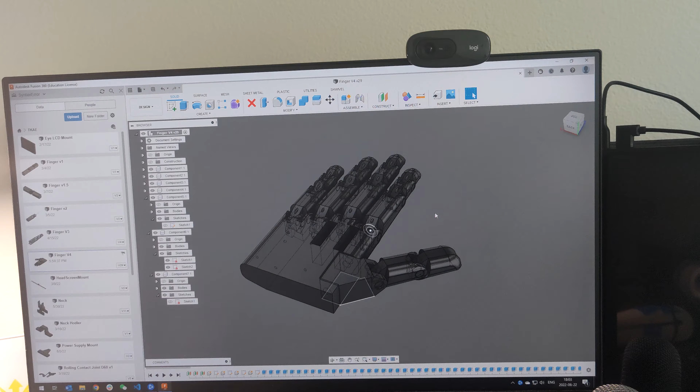Finger version 4. I think I have a video for version 1, 2, 3, and now it's 4, or rather hand. So

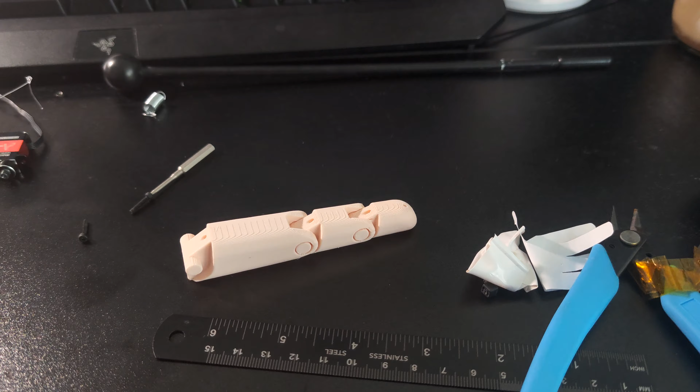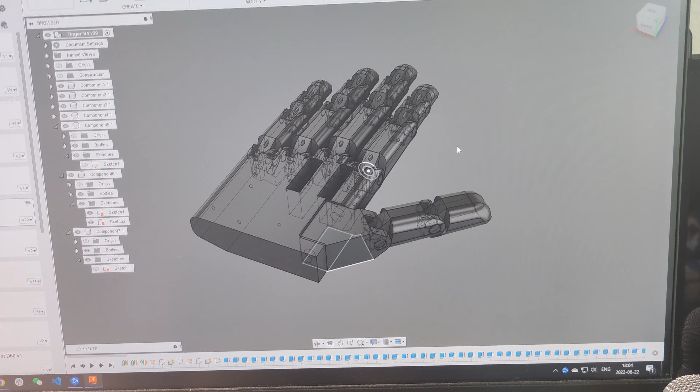this is just like, I think, exactly version 3 with some small modifications, because I just moved, so the 3D printer might be out of calibration, and also I've changed the printer settings, like tolerance, that stuff, so that it will print on any other printers. In the model, I can set it to more actual hole size rather than the adjusted size, especially for that Ender 3 printer.

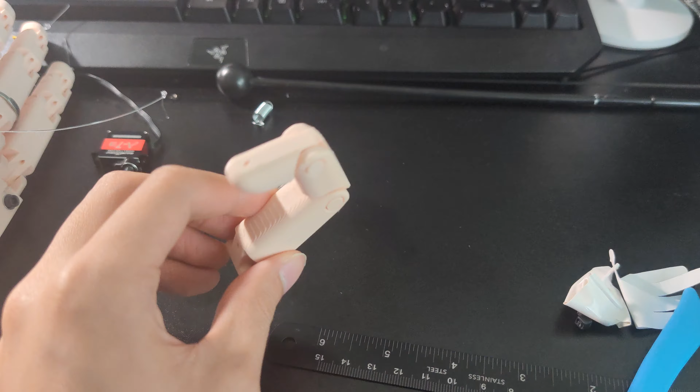Yeah, so that's the change, and to verify that it's still working, I printed this finger, and it's working fine. Yep. So after that, I spent some time modeling the rest of the 3 fingers and also the palm section to get this one.

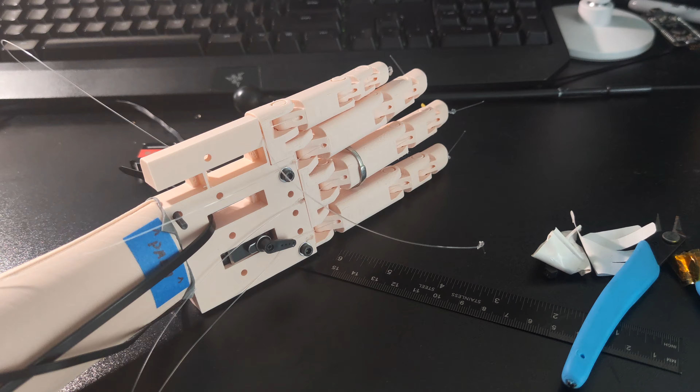So for this part, these are the print-in-place section. So you can see there are 2 screws connecting the lower part of the palm. So these are print-in-place, and basically this is a 9-hour print, so I spent the night doing that, and the second day I designed the rest of the palm to actually drive the fingers.

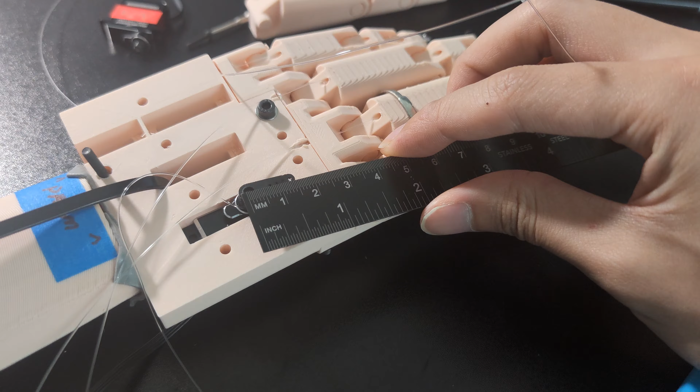Yeah. So on the driving side, I'm using a servo, but you can see with this arm, it's not fully retracted. This servo still needs to spin this much to get the cable all tightened. Yeah, and this is a 15 millimeter arm, so about 30 millimeters of travel is not enough. The cable is longer than that.

Yeah, but I don't think this is a huge problem. Even if needed, I can modify the servo to make it multi-turn. Also, I haven't tested the motor yet, but I think a 15 millimeter arm might not be powerful enough to do any actual stuff. It surely will drive the finger, but for example, when you are trying to hold something, I don't think this is powerful enough. So the idea is to make it smaller but multi-turn. Yeah, that's not a big issue.

The more important one is the other side. So for finger 1, 2, 3, I was using these kind of elastic bands to retract the fingers. They work fine, but the thing about these elastic bands is they are not linear. When they are fully extended, they have a great force, but when they retract a bit, the force gradually becomes 0. That's... Oh, I'm getting confused. But

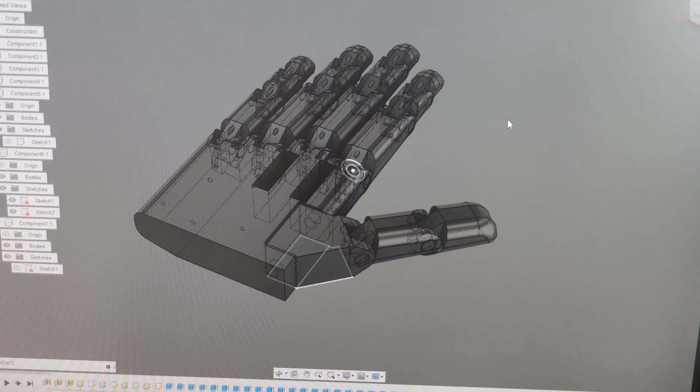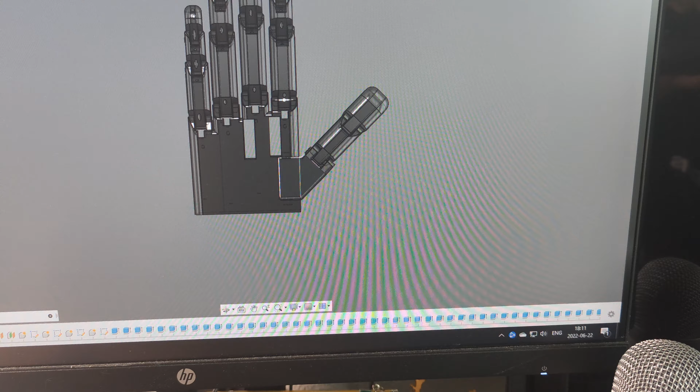Yeah. Oh, and also another update. Firstly, the thumb. I didn't include that in this design. It's only 4 fingers. So thumb. I'm now thinking that for the resting position, we place it 45 degrees with respect to the other fingers. And there are 2 joints. And also we place a vertical joint here so that the thumb will bend here. And thus we are able to grab stuff.

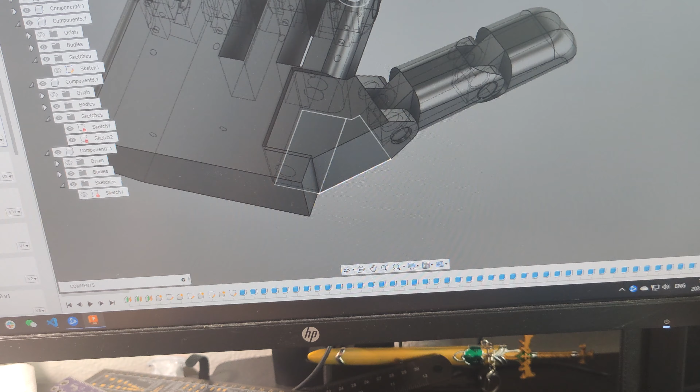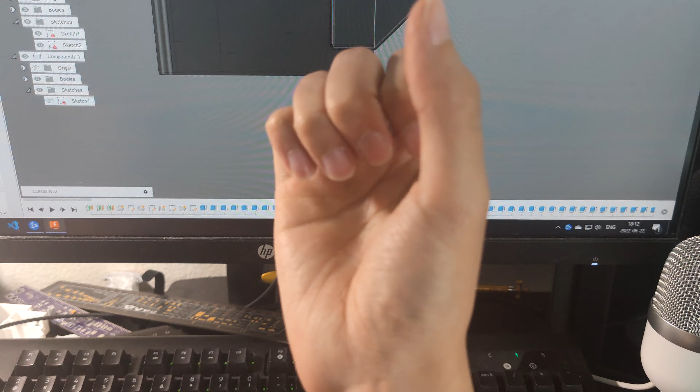And ideally the rotational axis of this thing should be slightly slanted, about here, because on our human fingers, it's from here to here, roughly. So when rotated, the thumb can be parallel with the rest of the fingers, and we can do stuff like this. But that's too hard to draw. I will leave that to future versions, and for now, I think this one would work. After folding it, it will be like this, which still makes it possible to grab stuff. Yeah.

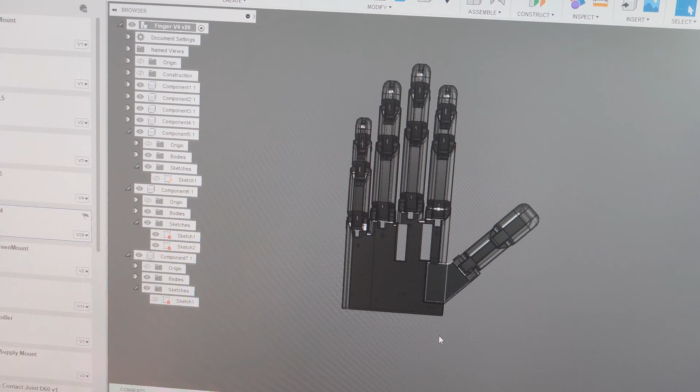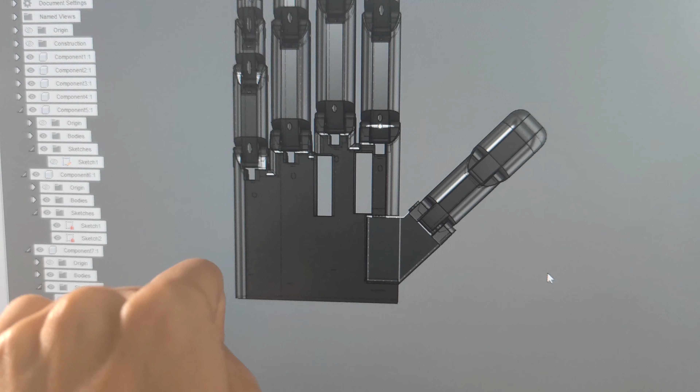And also for the servo mounts, originally I was thinking to place all the servos in the palm here to drive all the fingers, so that the hand will be a standalone module, independent of the rest of the arm. But now, because we have 4 servos for these 4 fingers, and also 2 for the thumb, there's not enough space to stuff everything in. Even if there is, it's too hard to model. So the plan now is to put all the servos in the arm, like most 3D printed hand projects.

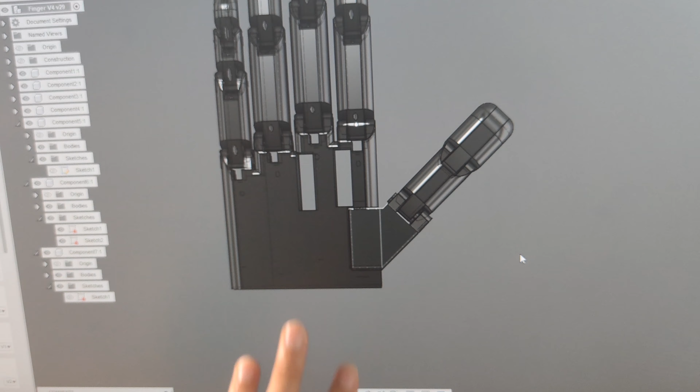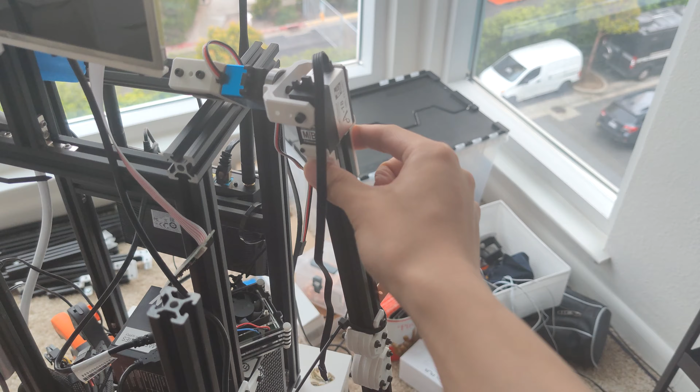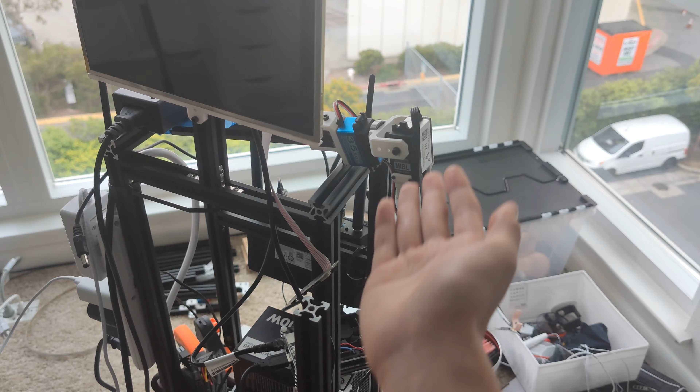Which means we cannot put the Z-axis, to make the hand move like this axis here, at the wrist. Otherwise, the cables won't pass through, or it's so hard to pass through. So because of that, I'm moving the Z-axis to the end of the arm. And thinking about that, I might as well move all the Z-axes to the upper side of the limb. So putting the Z-axis here and here, rather than here and here, because it helps with center of mass and thus rotational inertia and thus faster moving actions, and also less force on each rotational joint. For example, here the mass will be closer to the axis. Yeah, so that's the plan.

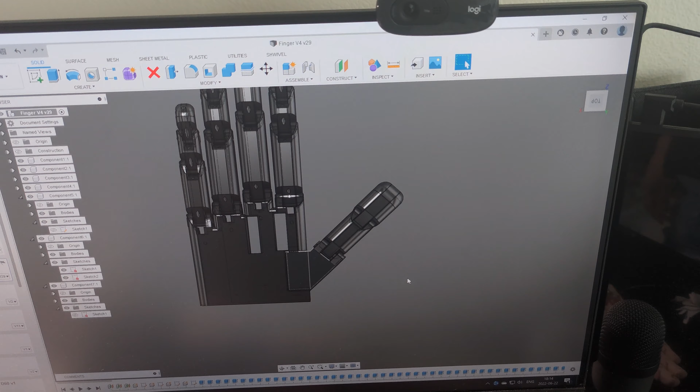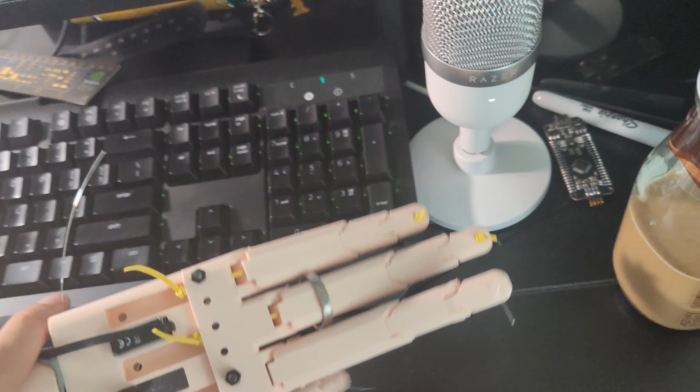I'm going to delete these two slots here, but add the slot for the spring like this, but longer, and make the entire hand print in place. I hope my 3D printer will fit. Yeah, it will fit. Wait, will it? Okay, let's try. At worst we can print it at 45 degrees. Okay, so that's the update. I think this one is already looking pretty promising.